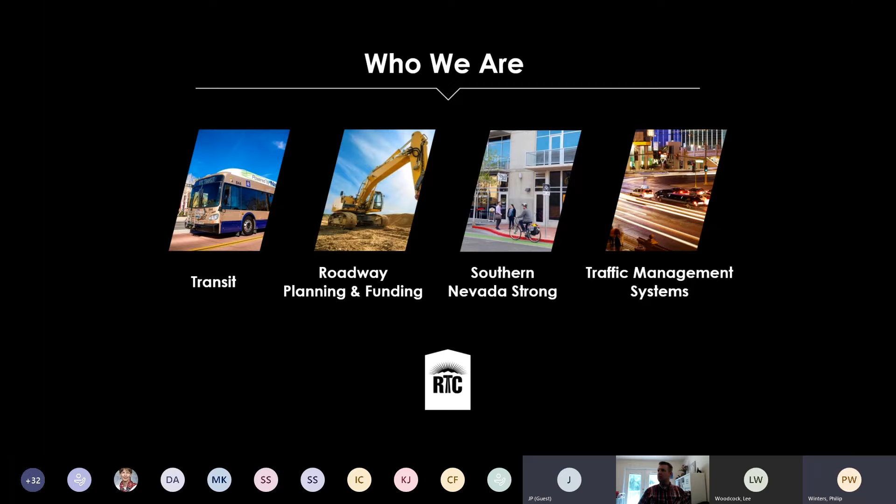So to jump right into it, the RTC's Work Zone Detection and Management Program started in 2015, and it was really the result of an extreme increase in construction activity in the valley. This increase was caused by many factors, not the least of which was a new local funding program called Fuel Revenue Indexing, or FRI. That program, and this is a 2013-14 timeframe, identified 225 mostly shovel-ready projects that were worth about $600 million.

The projects were promised to be delivered within a 5-year period, which was a very aggressive timeline, but that was necessary because this was coming out of the Great Recession, and it was really an economic stimulus package, a job creation bill. So that promise and the fact that the valley was coming out of the recession led to work zones, traffic control, and lane closures all over the valley, and it was causing a lot of angst.

So what's the big deal with temporary traffic control? One of the things you need to know is that the RTC does not permit any of the work zones in the valley. The member agencies do that. We provide funding for the capital projects, for maintenance projects, but the member agencies administer and deliver those projects and do all the permitting and inspections of the private development work as well.

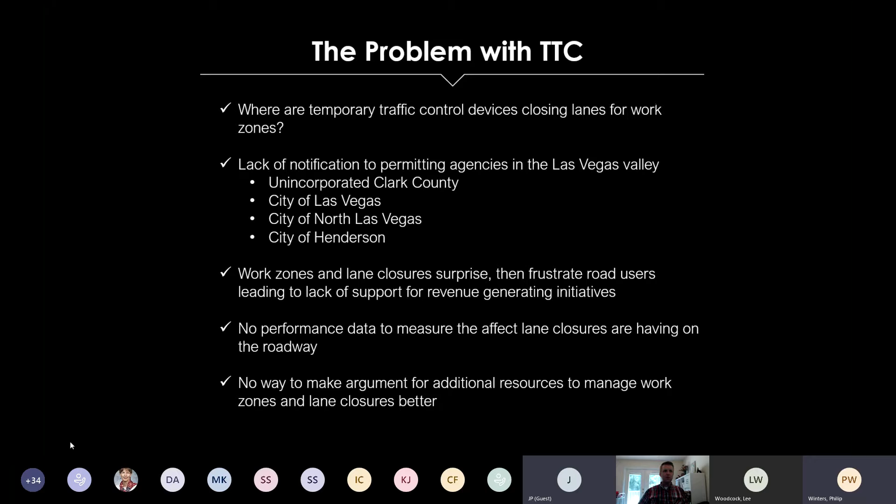So the concept of operation, we basically have this divided into 3 parts. Is there any way to move, I wonder, this? That's okay. I'll get over it. There it is. I figured it out.

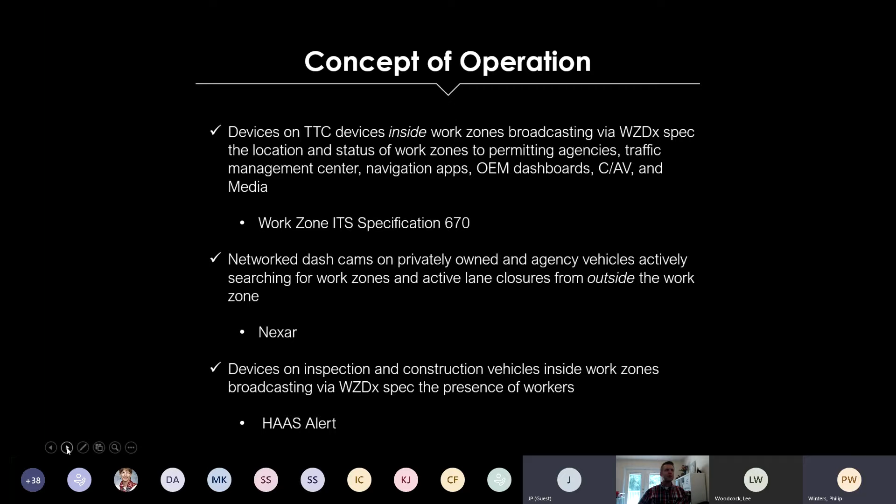Concrete curing, pavement markings curing, whatever. A lot of times, though, there are no good reasons. It's an issue with an out of compliance work zone. So we want to have the opportunity to know when people are actually in the work zone.

So next slide, please. So the work zone ITS specification. The draft of it is currently under evaluation. It is a voluntary participation at this point to get the member agencies to put that into their contract document so we can test the ability of the market to provide these connected, i.e. smart traffic control devices. Get them on the ground, get them broadcasting or sending out data, corralling that up, getting it in a format that is compliant with the work zone data exchange spec, and then sending it out for folks. This provides opportunity to industry to provide feedback to improve the spec.

It's in draft form. It has not been officially adopted yet. We've got a lot of great feedback. This spec took over a year to develop, and it's really been on the street just a few months, 3 months. It also provides the opportunity to discover the actual cost of connected traffic control devices. That's one of the things that we hear from some of maybe the status quo type minds that are still at some of the agencies. We've been doing projects for years. You can't make an omelet without breaking some eggs. What's the big deal? People will deal with traffic control as they've dealt with it for years.

We're trying to get a really good handle on what these things actually cost, so we can do a formal cost benefit analysis at the end of this. And we also want to see the benefits that are going to be provided when this feed goes out in industry. The market goes to work and spins back all of these wonderful things that only they can think of. Ultimately, the goal is to manage work zones better to increase safety while decreasing road user costs associated with the denial of access to roadway capacity, and that's really what it is.

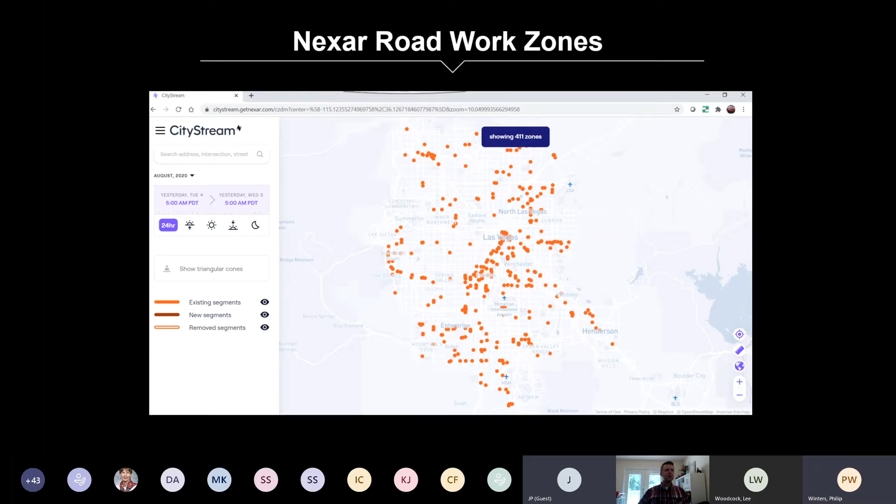You get the street location, the address, the time of day, the date, the heading the vehicle was going in, and the road you're on. So that's pretty cool. Next slide, please.

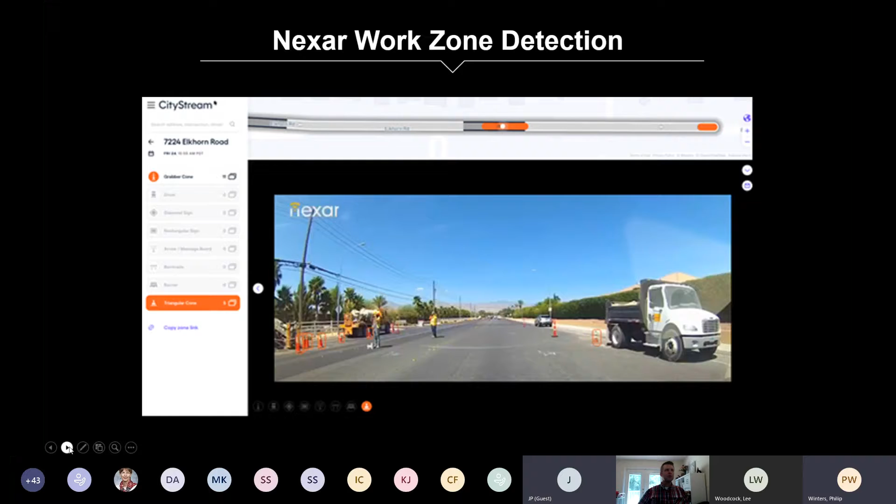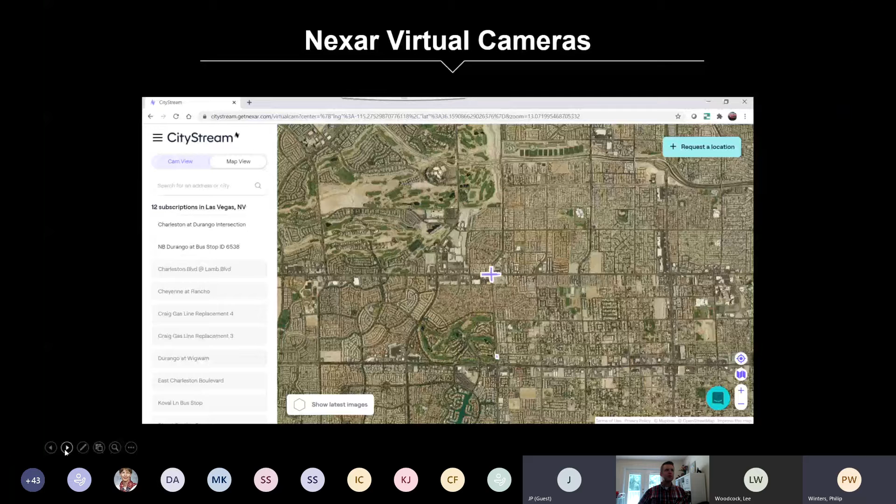And you can make those geofenced areas as large or as small as you want. It could be the work zone itself. It could be an intersection like this. It could be a bus stop. We applied for another grant, an FTA grant, with Nexar as a partner to use this technology to keep an eye on our bus stops on the Strip.

So this is really a powerful way for the agencies to get near real time, and we've tested this, and these images are uploaded within seconds of a person driving through, and we have access to them within seconds. Not technically real time, but close. So that's a powerful tool.

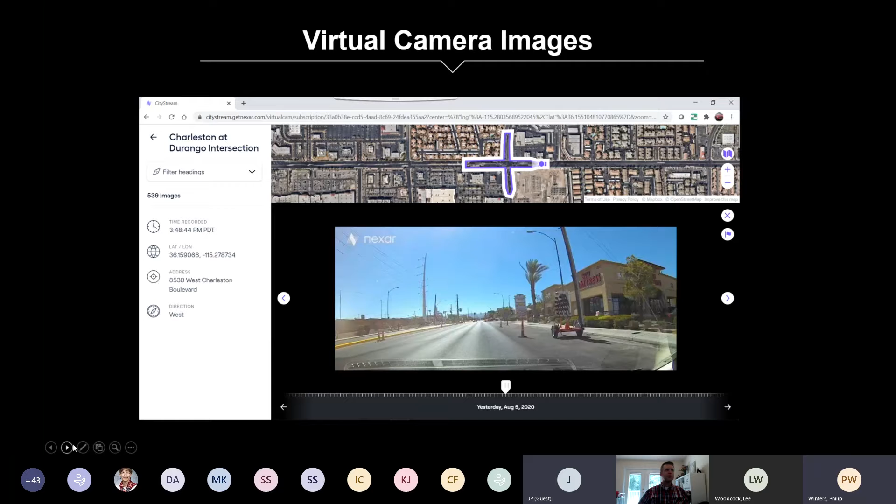You'll see at the bottom each of those little hash marks. Those are separate individual images, all with a time and date stamp. So that is pretty cool, we think. And the agencies think so too. Next slide, please. This is slide 12, so we're winding down.

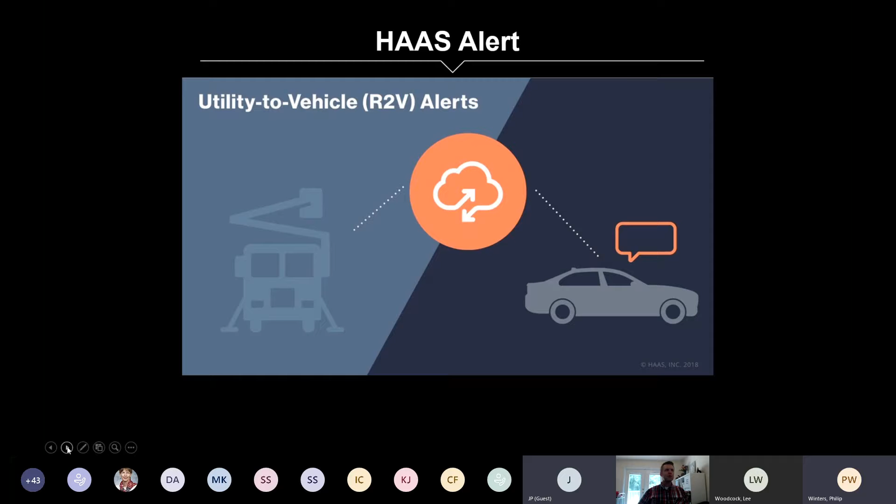The next partnership, the third leg of the Work Zone Detection and Management program, is our partnership with Haas Alert. We've been partnered with them now for about a year and a half. And next slide. This is where we want devices on work vehicles to let us know when workers are present.

As I mentioned before, the other huge benefit is that Haas Alert has a relationship with Waze, and Waze users will then get a warning in the app or in their dashboards, if it's a Waze-enabled dashboard in the vehicle, that there's a work vehicle ahead, and of course that's a good thing. People start looking around, what the heck is going on, slow down, pay attention, all those things that are wonderful in work zones for people to do.

But it also communicates to us when the amber lights come on, and I'll explain that in a second, that, hey, we got an active work zone. So a person calls, hey, there's a work zone that I don't understand. Why is it here? They call the agencies. They call the RTC. We can almost immediately see that there's a work zone there. There is no work going on.

Let's figure out why and get the cones down, get the traffic control down if there's no reason for them, and explain to the citizen why they're there without seeing anybody quote unquote working if there is a good reason for it. So that's good. It's a communication device for us, but it's also a safety device. And then next slide, please. Next slide.

That is what a vehicle looks like in the Haas Alert dashboard. The device is tied to the amber lights in the vehicle, so you can always track your vehicles. This was developed for emergency response, and we've kind of turned the concept on its head. The idea is that the emergency vehicles would have emitters, and people would download the Haas Alert app, and when an emergency vehicle was coming up on them, the two would communicate, and the user would get a warning: emergency vehicle approaching from the left, or emergency vehicle approaching from behind.

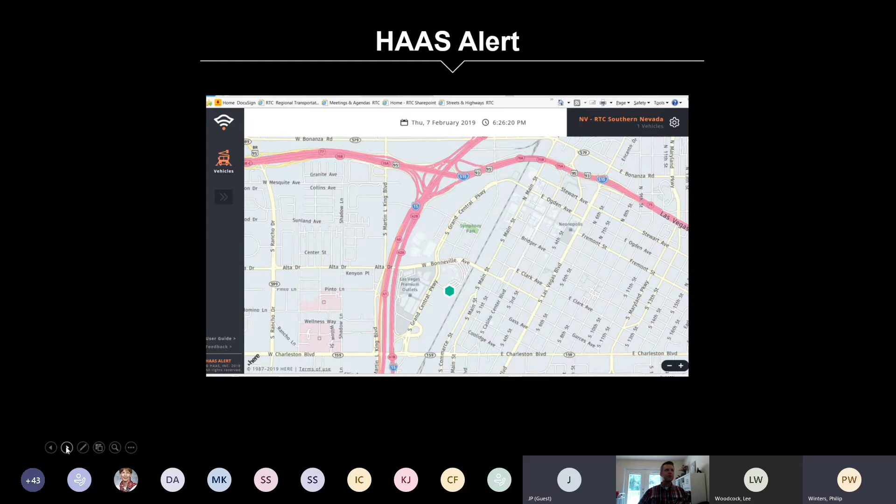So they're tied to the amber lights. When the amber lights go on, this goes green, and then if you click on the last slide, you'll see the message that shows up in Waze: utility hazard, utility vehicle ahead, work zone ahead. Again, this combined with the other legs of that stool I was talking about: smart devices in the work zone, broadcasting to Waze and through the work zone data exchange to other things.

The Nexar application that isn't open to the public, that's an internal system that we can use to find these things. And then finally the Haas Alert. Those three things are giving us excellent abilities to find active lane closures, which is really the point of all this.

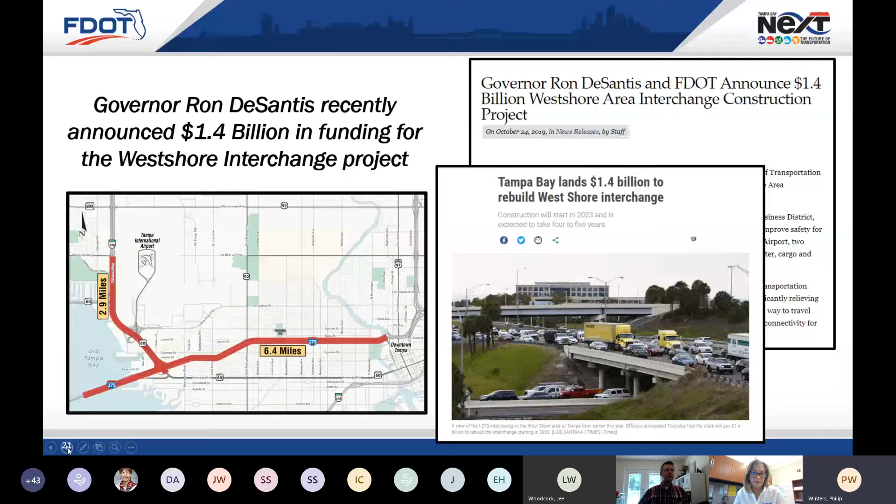And last fall, Ron DeSantis was able to announce that we were awarded funding for a $1.4 billion project, which is the reconstruction of the Tampa West Shore interchange. As you see in the map on the left, the general limits of the project are the Howard Franklin Bridge on the west, down to the Hillsborough River, and then on up towards the Veterans Expressway. This is a very big project, very important for the region, very necessary as well. Next.

So if you travel through Tampa, you understand that this is at the center of Tampa, and it's very congested. We have bottlenecks every single day. We have some capacity constraints, and we really need to make some changes. So we feel very fortunate to have the opportunity to expand the ability for people to move throughout Tampa.

It's very important to have an opportunity like this, and it's very comprehensive. So we'll be able to show you over the next several years how we're developing our transportation management plan in order to facilitate the construction of the interchange. Next, please.

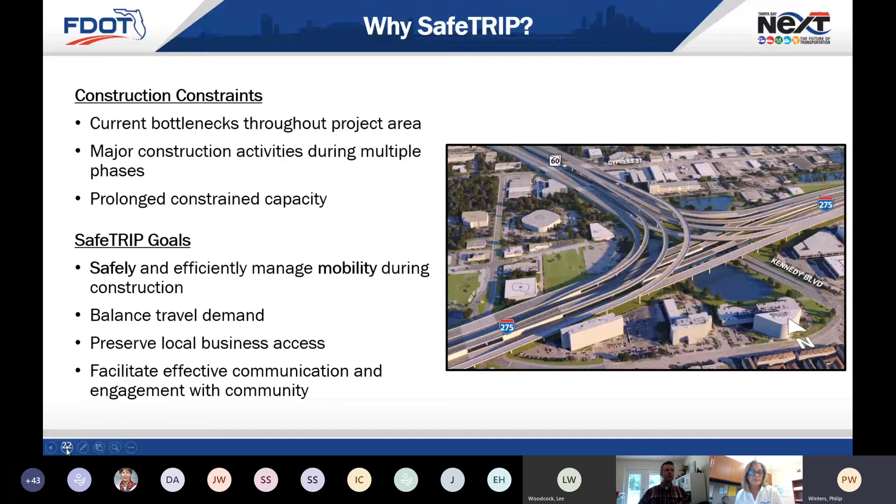So SafeTrip is the brand that we're using to encompass our transportation management plan. And that's basically our umbrella. And then TRIP, of course, SAFE is very important to all of us. We are in one of the worst regions across the country in regard to our fatalities and serious injury crashes. And we want to make a difference in that world.

And simultaneously, we need to manage everyone that's trying to move through the West Shore interchange. So we've divided into 4 elements that create our TRIP. So we have our traffic management, we have regional demand management, we have innovation and public engagement. Next, please.

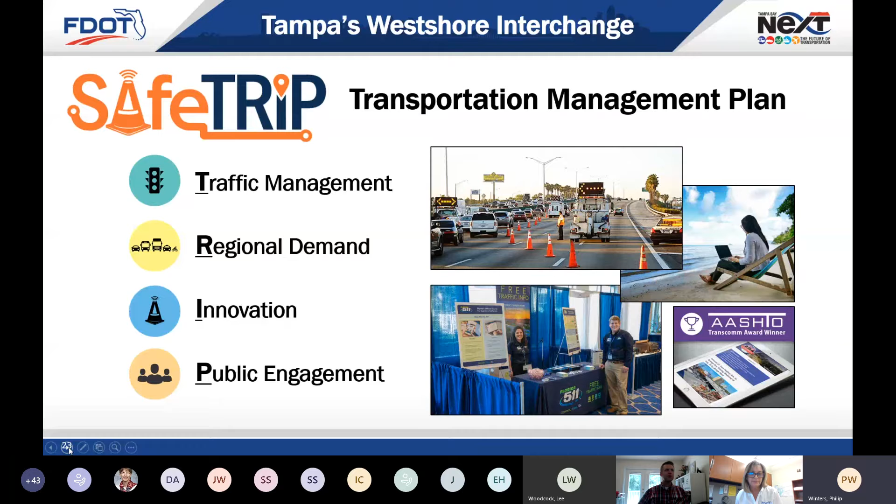We've spent some time so far establishing our vision and what we really want. And this is how it stands. We're working very strongly in creating a plan that is well planned and innovative. We want to make sure that we have the latest technologies available, and we're deploying those as quickly as possible. Focusing on safety and reliability, and making sure that we're not just moving cars, but also making sure that we provide quality transportation choices for all of our users. There's all kinds of needs out there, and we're being very attentive to that.

We want to be strategic in how we present and do our implementation, as well as make sure that we have proactive communication and we are receiving feedback and incorporating the feedback that we get, and then how does it influence our process. Next, please.

So this is a deeper dive into all the goals for our TRIP. And there's a lot to read here, and you can go back and read all of it, because I could talk about all this all day long. But in the traffic management, I am proud to say that at this point, we're looking at projects that we could advance and get on the ground before we go into construction. We're also looking at instrumentation. How can we use technology in order to help our local area network be more effective in handling any kind of increases in traffic on the local streets?

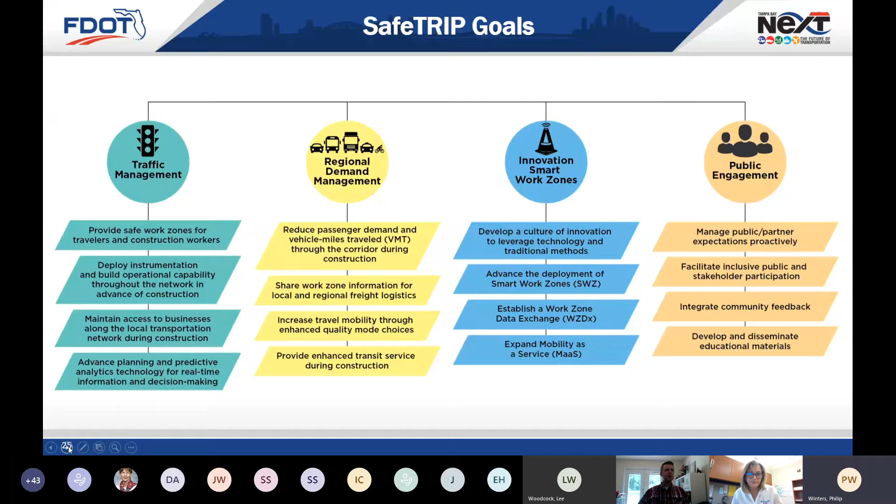It's going to be really important because, you know, as soon as you put those drums up, or barrels, whichever you want to call it, or an arrow board, you know that we're going to already lose some of the capacity. And it's about bringing people through the entire work zone safely and harmonizing traffic and traffic speeds.

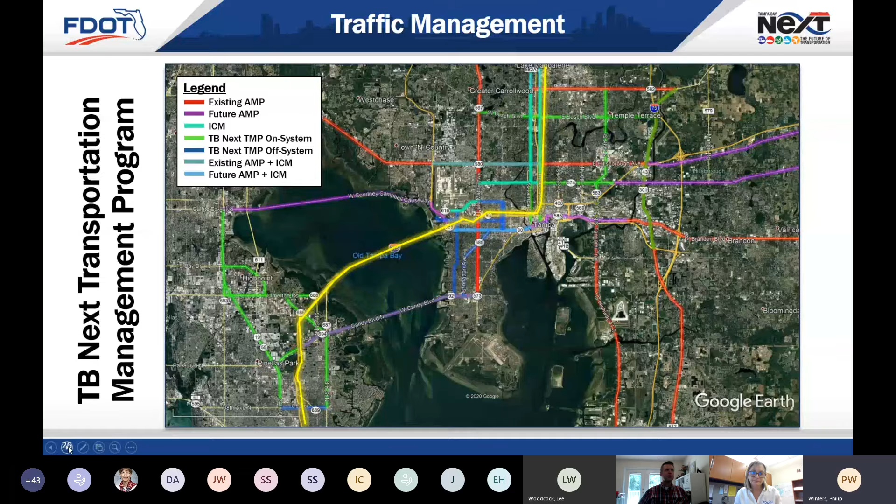Next, please. The regional demand management, where we stand: as a matter of fact, just yesterday, we got some pinpoints. We're trying to identify very specifically where people are commuting in and out of the West Shore area. We're identifying who's passing through, what that volume is, and recognize them as a user. But we're also getting down into those other trips, like a 3-mile bicycle trip is a reasonable commuter trip.

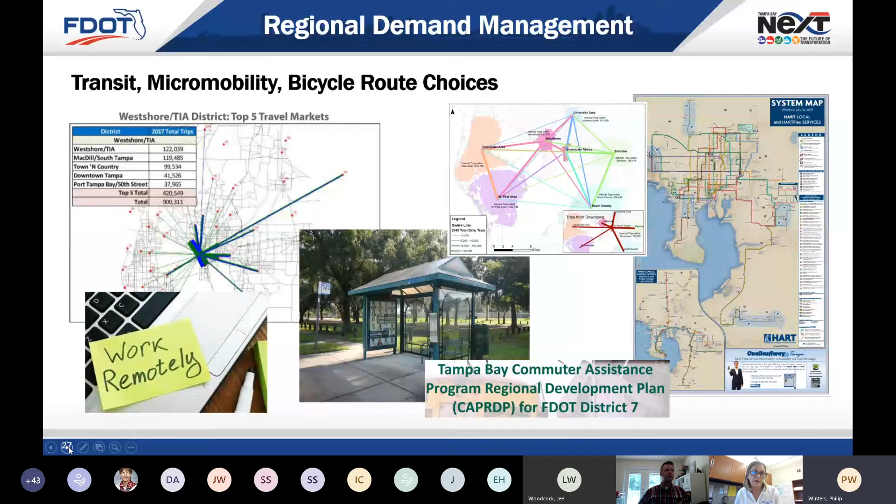So what about that 3-mile stretch? And then do they have safe choices in order to do their daily commute, maybe on a bike? I mean, we do live in Florida, and it may be hot right now, but most of the year it's comfortable and you can actually ride your bike to work. Next, please.

Another sub-element that we have under innovation is our smart work zones. So the zipper merge is the late merge. And that is a concept that has actually been deployed in multiple places across the country. And we're working very strongly on how to make that work and make it as real time and automated as possible. We also have speed harmonization as another component of our smart work zones. You'll hear a little bit more about that when Dan D'Antonio presents about our pilot project on Gateway. Next, please.

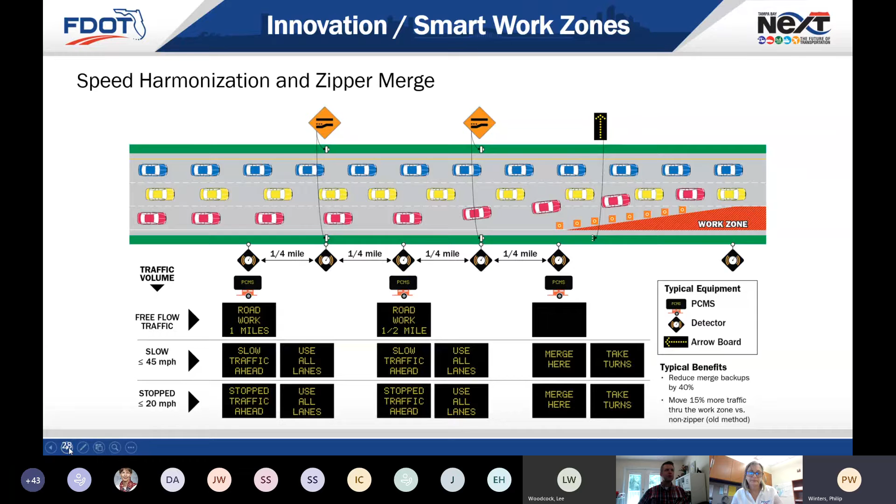The public engagement, it's all about having that real-time data out there. We have been doing a lot of research on the use of iCone products. I love the concept of having the sensors that are already on the arrow boards and using the rentals. They already have the smart technology in there. So if anybody activates an arrow board, then we're going to be able to send that information out and get it to Waze, basically, or any kind of app that somebody's already using in order to navigate the transportation system.

Fortunately, in Florida, we have Florida 511 and then the DIVAS program. As far as getting out data feeds, there's a very robust opportunity that's already occurring in Tallahassee. So we are paying attention to what Tallahassee's doing, but we also want to make sure that we have a robust program here within Tampa. So there's a lot of action that's going on. We're trying to bring it all together. At the end of the day, it's really getting the information out to the public. But we're into neighborhoods, we're into all kinds of different smaller groups as well, or larger groups, excuse me, and businesses. Next, please.

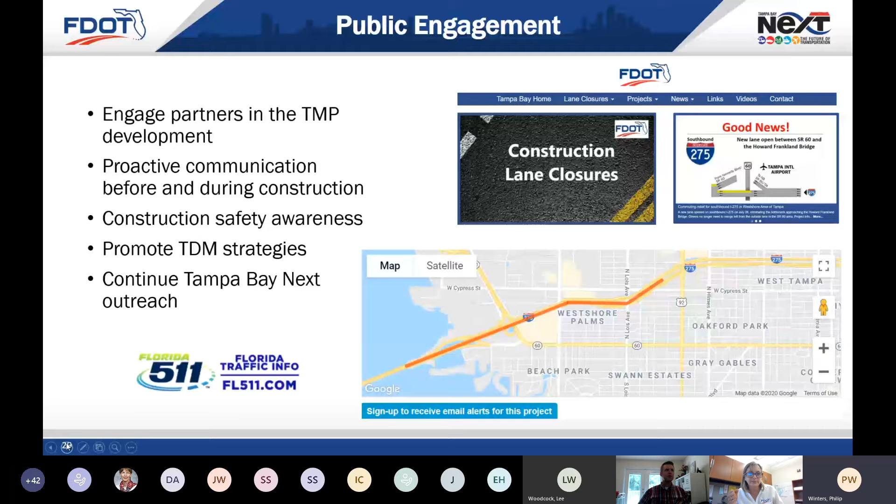So on the business side, we do have a community advisory task force, and these are our business partners, and we've had our first meeting already, and we have another one coming up probably the first part of September, if not the end of August. We look to them for feedback and participation. Some of the smaller projects they may be able to deploy, they may be seeking grants or whatever it might be, because it is going to take a very collaborative effort.

I like how, JP, you had mentioned that someone on the street doesn't necessarily know the jurisdictional boundaries. So it's upon us to be seamless in order to provide the solutions from this one government. They just see government, and we need to make sure that we're doing our job and we're being collaborative so they have the best experience within the transportation network. Next, please.

The community engagement that we've been performing has been very robust. We needed to, because we needed to change what we were doing from a couple years ago, and we continue that. Even though we're in this COVID situation, we are still having meetings. I think most people have gotten to the point where they're comfortable being on a Zoom or a Teams meeting or whatever it might be. It's the nature of our business now.

And we even now have guidelines to do public meetings on an interface or a platform such as Teams, like we're doing today. We're pushing a lot of information out, so we're trying to get information out as well as making sure that we create the right conduit for people to send feedback to us as well. Next, please.

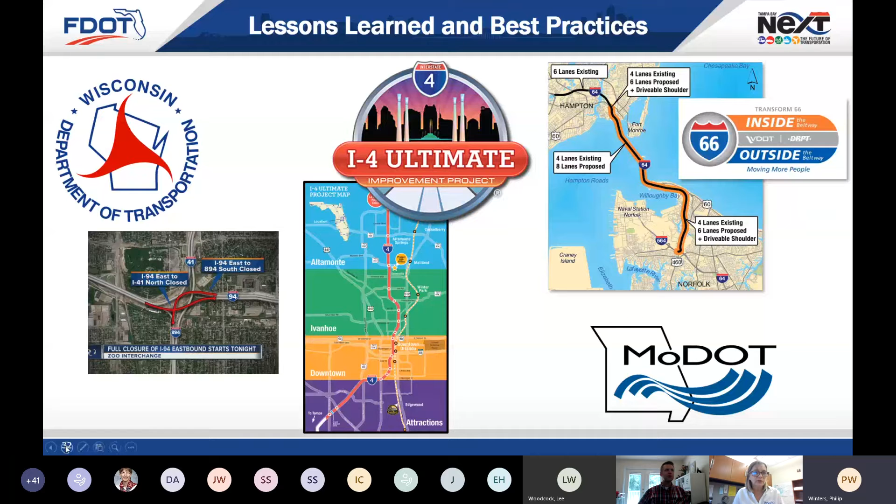So hopefully one day, because our project is so large, we're going to be able to share this same information and our lessons learned with others. So every go around, it's going to get better and better. And then we also have some additional calls that are coming up with Wisconsin. Next, please.

So here's an overall schedule. We are developing Safe Trip right now. Then we expect to complete the plan and let it kind of rest. We're going to finish that up and have a really good, strong document in the spring of next year. And then in the meantime, right now we're looking at early project deployment.

Because there are projects that are already in our work program, we're trying to make sure that those stay on pace or on target. If there's a reason they have to be delayed or there's a reason we can't get it done, we have to look at how we're going to supplement that. And so we're studying very closely. It's a very demanding time right now for us to establish funding mechanisms and then looking for future projects. And we are looking for a lot of different ways for us to get things built.

Again, we're not just looking at DOT activities, we are also looking at what local government agencies are doing. For instance, we're very interested in seeing what the city of Tampa has on their plate for their bicycle infrastructure within the Tampa Bay area, and how that bicycle infrastructure is going to be built and in place by the time we go into construction. The West Shore interchange starts in 2024. That's when we get our shovels in the ground.

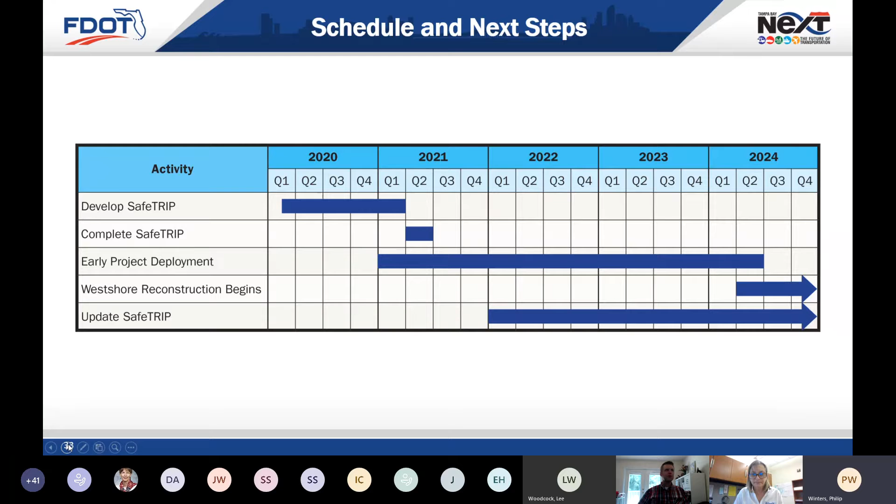And that's all I have, and I am ready to answer questions. It's a lot, but there's a lot of background, and I've got a lot of great people standing right next to me to make it happen. Excellent. Thanks, Margaret. Any questions from around the floor for Margaret? Wait, really? I've got one for you.

You mentioned COVID a couple of times, and we don't know what the future is going to look like in terms of how travel is going to change, how accommodation requirements are going to change for businesses. But how have you been able to kind of scenario plan for increases in different modes that might be used, like you say, car through to micromobility or to cycling, and the demand from businesses?

How do you reconcile all of that in what you're looking to do? Can you reconcile all of that? Well, we're still in the process of developing the strategies and the concepts that might be available. And because we're still in the early stages of this, we are basically putting everything on the table that we can possibly put. You might be familiar with the successes of the Downtowner for downtown. And that program has been very, very well received.

And when it comes to the TIM group, they started bringing to our attention elements such as making sure that we have shoulders. Even though you may not have shoulders through most of the work zone, do you have locations every half mile or so where it's wide enough that a Road Ranger truck that has a push bumper would be able to push a vehicle out of the travel way? And then also making sure that we have all the legal rights in order to push it before the FHP shows up and it becomes something much bigger than what it needs to be.

That's just one example. And then also we've already talked about having a more robust Road Ranger program, and then the higher back program, how can that enhance it? So that's a complexity, but that is certainly baked into what we're working toward accomplishing.

Excellent. Thank you, Margaret and Alice. And Dean has just said the Hillsborough meeting is on August the 18th at 10 a.m. So perfect timing. Right, thank you, Margaret. That's really appreciated. Let's move over to Dan on Smart Work Zone concepts. I know Phil has been trying hard to give you control, but I think we're just going to have to drive it. Next slide, Dan, if that's okay. So over to you.

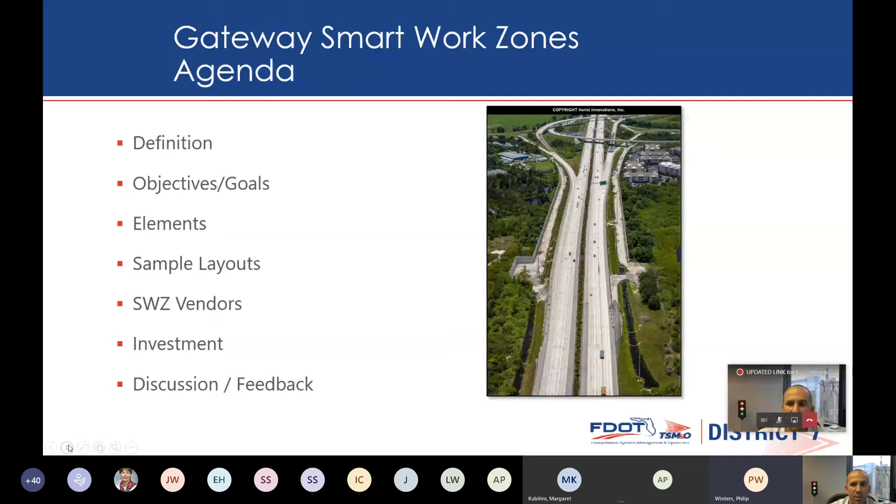So FHWA defines a smart work zone as a work zone that's real time, that it's portable, it's automated, and it's reliable. And I'll show you how each of these components are being considered for Gateway. Next slide.

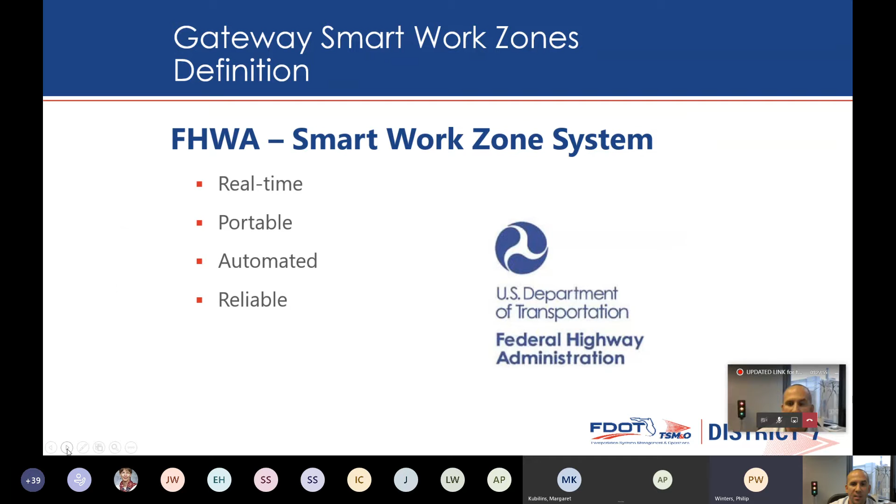So as part of the Safe Trip initiative, we've identified goals and objectives for what we want to achieve with smart work zones. So they're pretty basic. We want to improve safety, and we want to harmonize speed. Harmonized speed is a twofold benefit. It can improve safety, but it also can improve throughput, which in turn improves reliability. Those are two things that are increasingly important for over-congested, oversaturated areas such as the Tampa Bay area. Next slide.

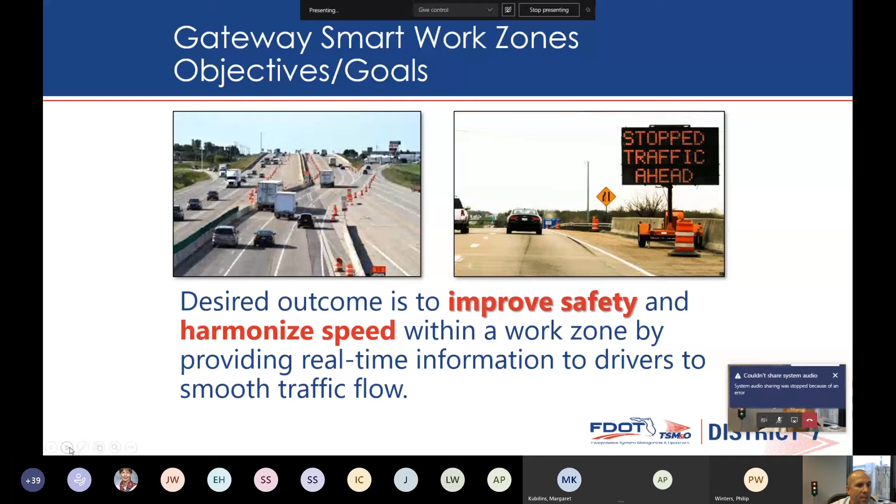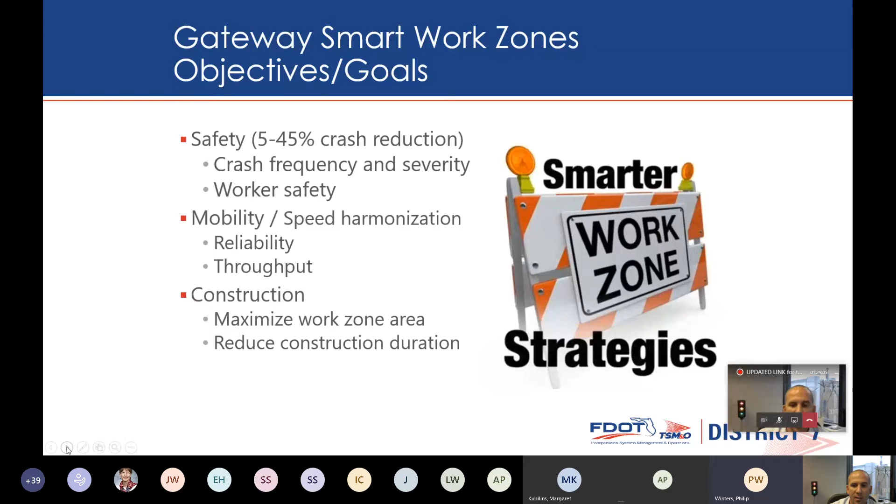So across the country, although smart work zones are somewhat new, we do have some statistics that we found where we can expect to reduce crashes by about 5 to 45%. It's pretty big stratification, which is part of the reason why we're looking to get some data for the local area. We do have some tried and true TSM&O solutions that have improved mobility through speed harmonization. And then within construction, we definitely want to maximize the construction zone areas, which would reduce construction duration. And these are really key things for contractors. Next slide.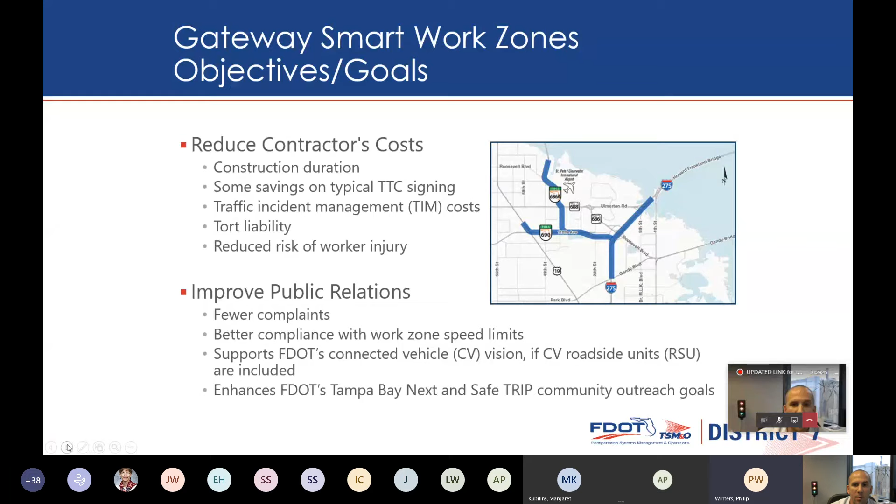So the Gateway project is what's shown over there on the right part of the screen. And this slide is put together because we actually have to get buy-in from contractors if we're to implement smart work zones at this stage in the project. So with the RTC, it might be a little bit different where we're not necessarily integrating in with contractors. But with this one, we need buy-in. So we put this together to show the benefit to them so that we can get smart work zones implemented, not just in Gateway, not just in Tampa Bay Next, but broadly across the region. And then we can share these. I don't need to read the bullets for you, but that was the intent of the slide, is to show the benefit from the contractor side. Next slide.

So now to move into some of the basic elements. Well, the real-time data collection, we'd really want to know what speeds are like through the work zone, and the speeds will allow us to harmonize those speeds. Queues are also very important because we want to be able to message on where to expect queues or stop traffic. And then we want to know the volumes, which give us the throughput part of the equation.

With the real-time messaging component, that's where we're going to use different techniques to provide messaging to the drivers, whether it be through roadside portable changeable message signs, onboard units for connected vehicles, smartphone apps, and a number of other ways to provide that messaging. And on the harmonized speeds, it's a very important component, and I'll show you how we're looking at variable speed limit signs, specifically in Gateway, to achieve that. And then lastly, this information is going to be relayed back to the Regional Traffic Management Center. Next slide.

So the various subsystems that we're looking at are definitely smart and portable sensors. Closed circuit television cameras, those are deployed along our roadside, really on 1 mile spacing, but already give us full coverage. But smart work zones introduce different geometries. And whereas our permanent CCTV locations may suffice for our existing geometry, they may not for the work zone. Portable changeable message signs, and as we saw from the previous presentation, they're getting smarter. They're not just providing messages. Variable speed limit signs, speed feedback signs.

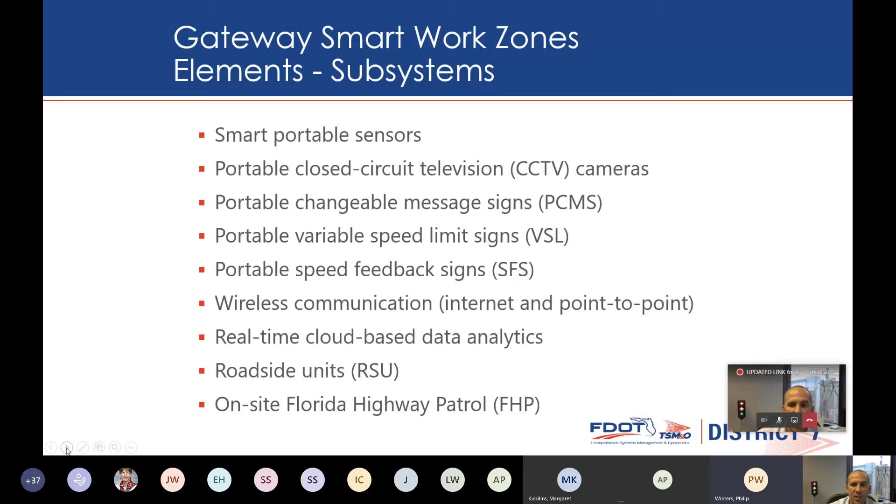The devices are important, but then we also want to be able to communicate. We want to collect data, transmit data, specifically in a WZDx compliant data feed. And then we want to store that data in real-time cloud-based data analytics that will allow us to process it and make decisions. And then the last two components or subsystems are traditional roadside units. Well, they're becoming traditional as we've gotten more CV deployments. And then FHP for enforcement activities. Next slide.

All right, so for the portable sensors, I wanted to show the group that they come in various shapes and sizes, and that's really important for work zones because in Florida, we see drums quite frequently, but we also see concrete barriers, and concrete barriers allow us to actually deploy the strobe lights on top of the barriers, and these strobe lights can also have sensors. So if we don't have barrels, but we have barrier walls, we can still deploy these. We already saw they come in cones, and they also come in portable changeable message signs, which give us a lot of tools in the toolbox for collecting the data at the locations that we need. Next slide.

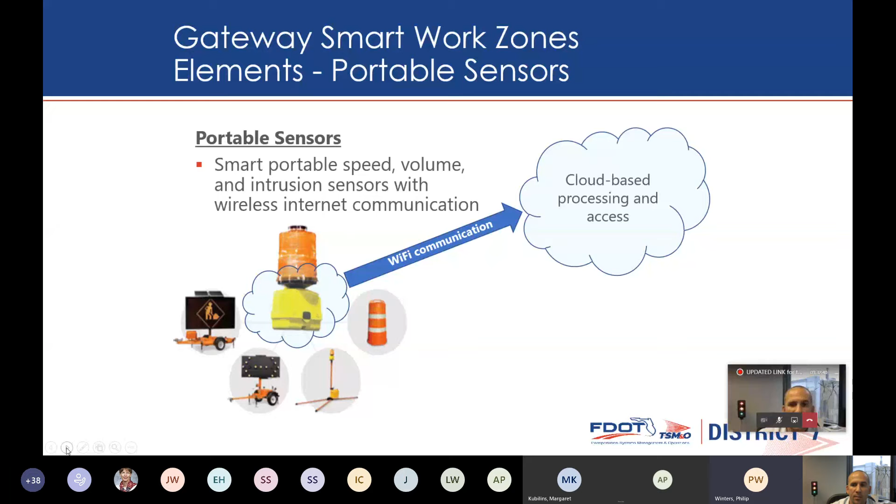We talked about the portable CCTV, but the one thing I wanted to point out on this is not only is it for surveillance from the Traffic Management Center, we can also do things like speed collection, volume collection, wrong way driving detection, various other data collection efforts with CCTV. And that's what makes a portable CCTV even more valuable. Next slide.

So with the portable changeable message signs, generally they are connected to the devices. They can display a library of messages that are predetermined based on algorithms that are fed by the device data collection. And then they provide the feedback to the driver in a traditional roadside method. Next slide.

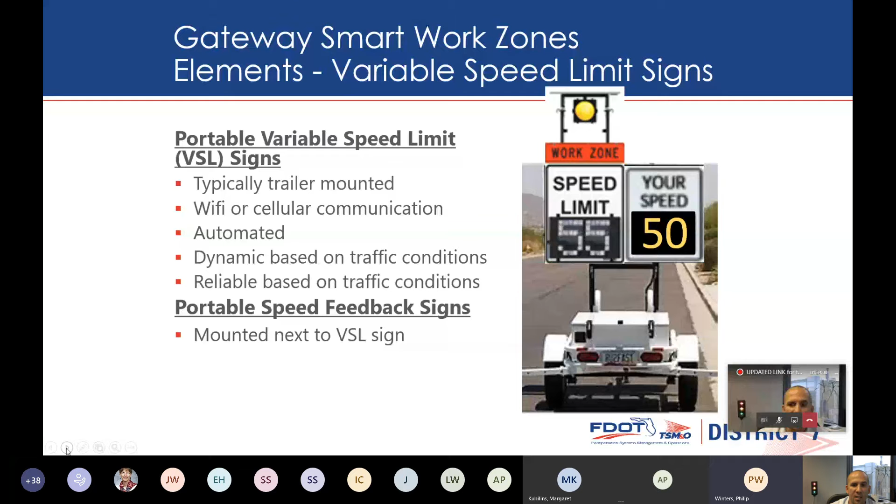With the variable speed limit signs, you'll see on our diagrams that these are components that we're looking for in the speed management component. So there's really three parts to it. Posted speed limit, which could be enforced by the law, the speed feedback, which is reminding people what they should be traveling, and then we can enhance that with additional devices such as the flashing beacon you see in the example. Next slide.

So this is a little diagram of, I think, what this group is mostly familiar with now and how we would implement something like a data warehouse and a work zone data exchange compliant data feed. So we're collecting new types of data from all of the smart work zone devices that are deployed or can be deployed. We're enriching that data with more traditional methods like the cameras or Bluetooth readers, weather stations, road weather information systems that we already have deployed. The intent on a work zone data exchange is to make that all in the same data format so that anybody can come and grab that data and use it, as we heard about in the previous presentations. Next slide.

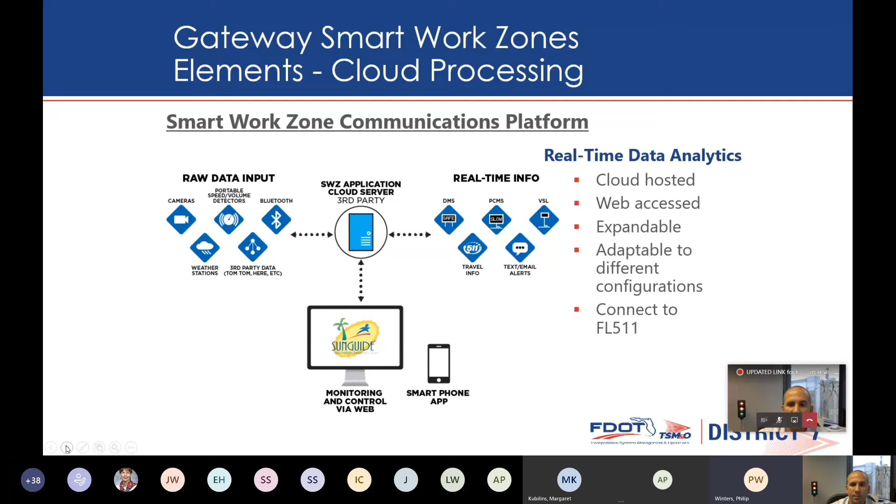So this is a layout of the zipper merge. I want to fast forward to the next slide to give you a little bit of a PSA announcement that Minnesota DOT did for the zipper merge. If you click on that, it may open that up in YouTube.

What is a zipper merge?

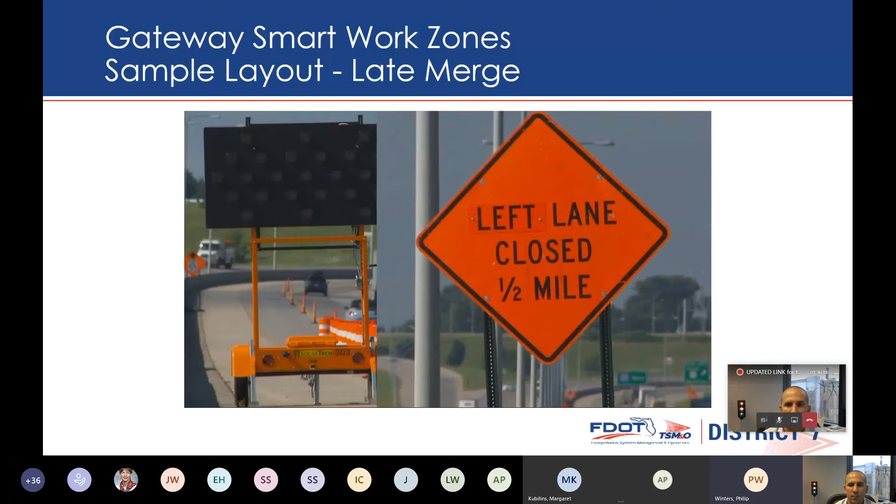A lane is closed in a freeway construction zone. There are signs and arrow panels well ahead of the closure to let motorists know they need to move to an open lane. Traditionally, drivers merge as soon as it is safe to do so. Use a traditional merge when traffic volumes are low and cars are moving at highway speeds.

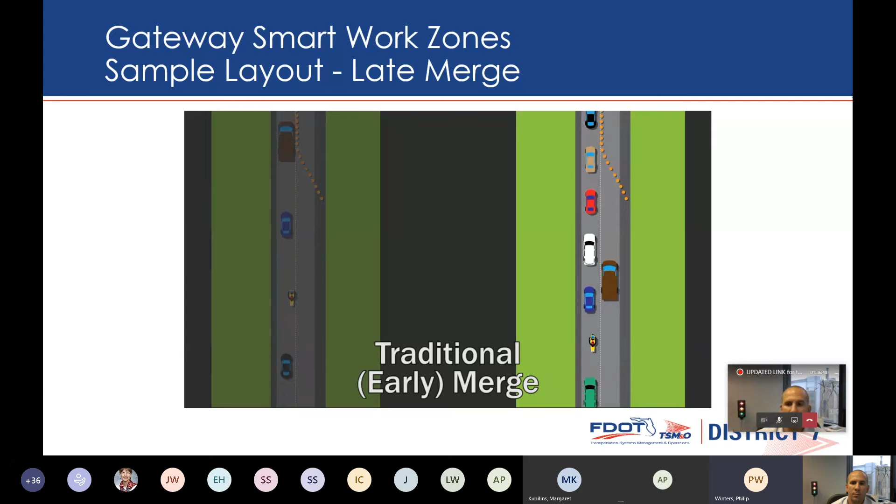When traffic is heavy, that one lane can back up fast. Sudden dangerous stops, significant delays, and angry motorists. When traffic backs up, there's a better way to merge. A zipper merge, also called a late merge, has motorists stay in their lanes until they reach the merge. There, each driver takes turns, alternating one lane of traffic, then the other, just like a zipper.

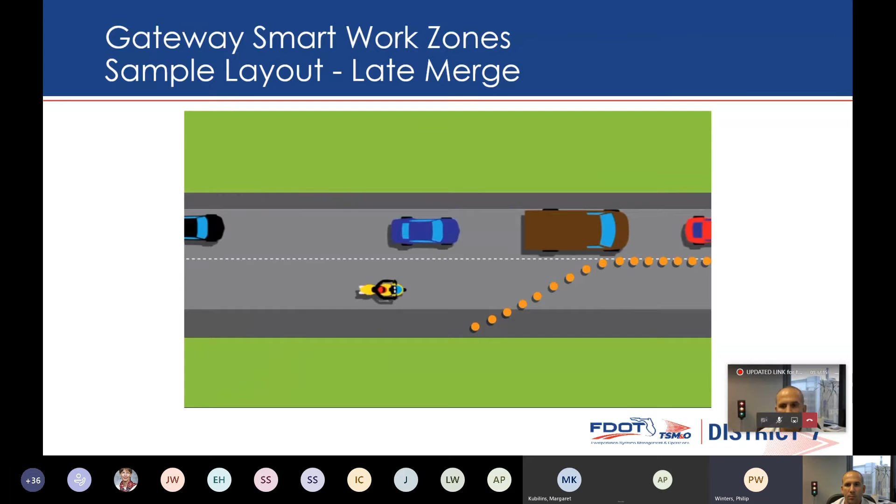Research has shown that this reduces backups by as much as 40%, as well as reducing serious crashes and road rage. Traffic can flow smoothly, backups can be reduced, and everyone benefits. So make your drive a zip. Do the zipper merge.

So I thought that was a good demonstration of how it works. You know, it's really just being courteous to other drivers, but the way a zipper merge works in reality, which is what we're showing here, is through a series of messaging, reminding people that this is the better way to merge for the benefit of all.

But the unique thing about a smart work zone is that the message signs are populated by device placement, which would indicate lane closures, but then also by congestion as shown by speeds and volumes within a work zone. So it can fully be automated, and that's what we're showing here on what would eventually be a standard plan. Next slide.

And it's a similar scenario where we start to have more lane closures. Within Gateway specifically, we do have 2 lanes closed at a time in some instances as they do quite a bit of bridge construction. I know the folks that are live in this region know that that's a big mammoth project, but on the scale of the West Shore Interchange for the Safe Trip program, you know, that's a $1.4 billion program. So we'll have several of these applications, and we'll go through these standardization and plans with each of them in deploying the smart work zone devices.

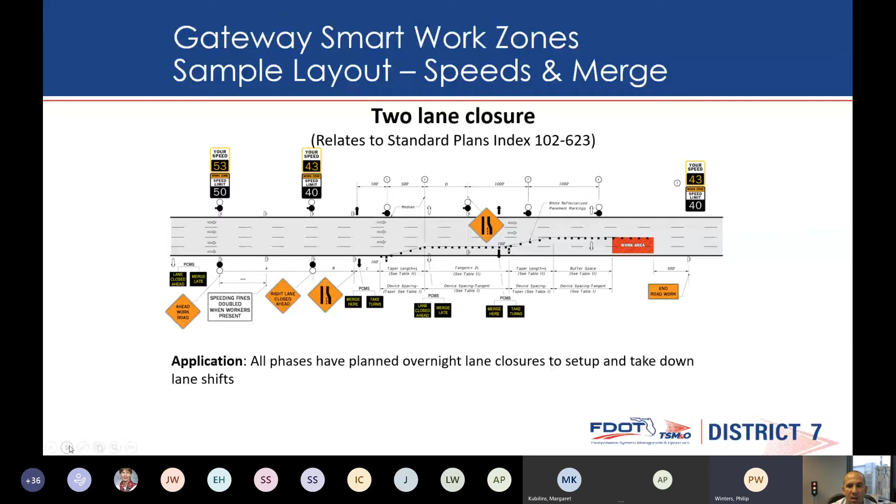Next slide, and we're wrapping it up here. So this is the most complex. This would be a diversion. So it seems to get fairly busy, although this is condensed. But you see what we have on here is all of our smart work zone strategies where we have speed management. You see the variable speed limit signs. We show the devices that are detecting what's going on within the work zone, and then also zipper merge. So the good thing about the smart work zone strategies is they are scalable and they can all be overlaid for specific use cases. Next slide.

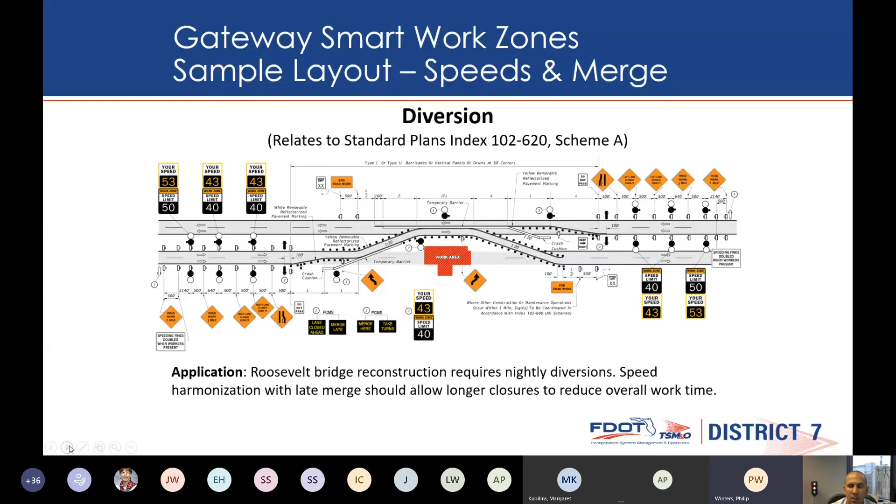So through some research and looking at and talking to vendors, we have put together this return on investment chart. And really what we're seeing is that the longer we deploy the smart work zones, the greater the return on the investment. Although the cost escalates, the number of crashes that we can expect to reduce also increases to where we see some very big returns on investment for some of the longer duration construction projects.

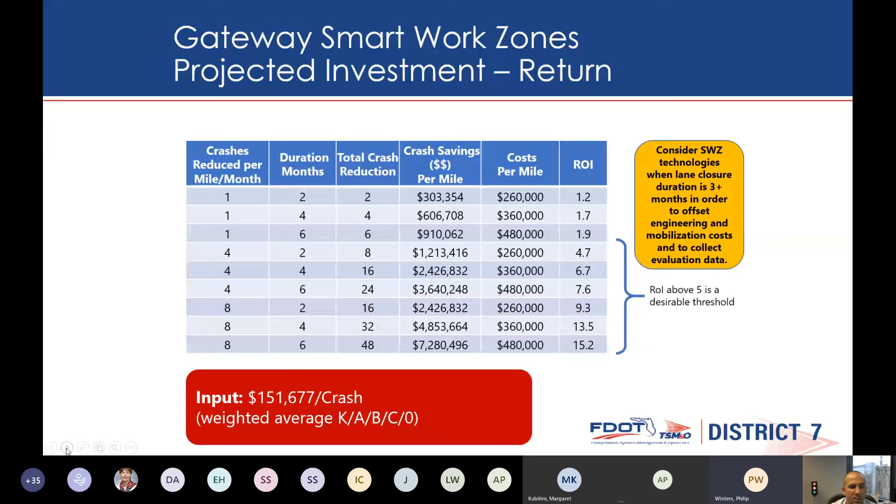And we're really looking to refine this graph or this chart as we collect real world data here within District 7 in the Tampa Bay region, starting with the Gateway deployment and moving on to other projects. And with that, that's the update on the approach for smart work zones within Gateway.

Awesome, thanks Dan, thanks for doing that so quickly. Got one question coming from Pete Costello. Do you want to unmute yourself and ask your question?

Sure. Thanks, Lee. Hey, Dan, has that merge late message been used with success elsewhere? Yeah, actually, of these strategies, I think that is one of the more mature. And so when we talk about mature, we're only talking 1 to 2 years. I can't tell you exactly where, but it hasn't been used that frequently within Florida. Although I do know that there are some arterial areas that we're also looking to deploy it and look at the benefit. But Pete, I'll follow up with some of the research that we've done on other areas where it's been deployed successfully. Thanks, Dan.

Sure. I can chime in. It's been done in Nevada. The Nevada Department of Transportation did it on our huge Project Neon, which was on I-15 right through the middle of downtown Las Vegas and US 95, another urban freeway that intersected with that. So NDOT was very pleased with it. Great. Perfect. I won't follow up, Pete. There's one example.

Excellent. Ken Spitz. Ken, have you got a question regarding standardized signs? Hey, Dan. I know in the past, I think it was in Georgia, I saw a sign at a ramp, and I don't think it was necessarily construction, but it was one of those 2-lane to 1-lane, you know, as you're coming on, and it said take turns. That's kind of a zipper merge, that's exactly what it is. Are there some sort of standardized signs that FHWA is using? Because I don't think most people are going to know what that concept is.

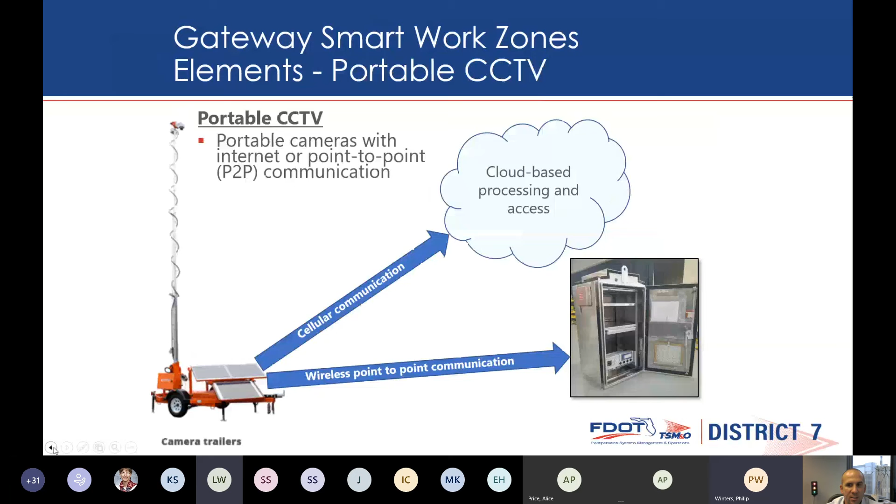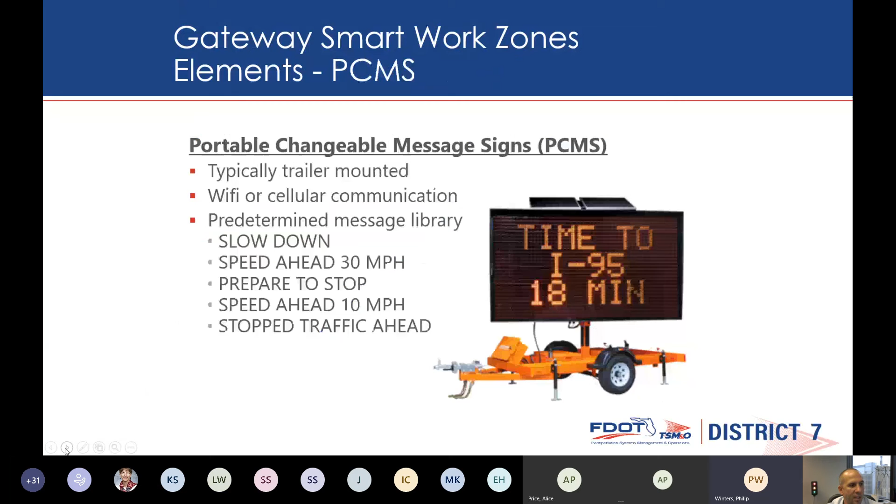And the last thing on that, if you would just real quickly show slide 15, because I think slide 15 does a good job at showing the sequence of messaging to do our best to get people to obey the signs. Next slide past that one. Keep going towards the end. It's actually towards the end that showed the layout of the zipper merge, and we went through that one pretty quickly. But it shows the sequence. There it is. So slow traffic ahead, use all lanes. Road work ahead, slow traffic, use all lanes. And then merge here, take turns.

That does require that the yellow cars in that line are courteous and let the red cars in. But the concept is that if they're seeing that these people were directed to do this, they'll be a little more generous in allowing them a gap to enter that middle lane. So, we'll see how it works. We heard that it worked fairly well in Nevada, and we'll test it here.

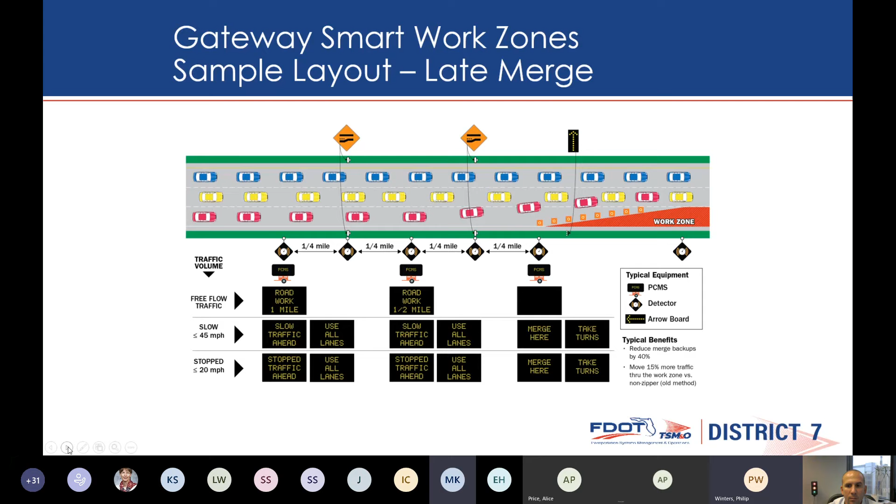You can also go to YouTube. It also worked in Virginia. Yeah, you could go to YouTube and just check for other examples of this. In our research, there's three different versions of the PSAs that were going out. So there's a lot that is already explained out there.

Excellent. Thank you all very much. Thanks, Dan. I really appreciate it. So I'm going to be bad cop and have to move on to the next piece. This next part of the agenda is more conversational, more open. Sean's going to facilitate a conversation around work zone data particularly. But then there's a section towards the end where we've got more of an open forum for public agencies if they've got any updates they would like to share and contribute any thoughts they would have. So I will now hand over to Sean.

Thank you. Great. Thanks, Lee. So I'm Sean Barbeau with the Center for Urban Transportation Research at USF, and we've been talking about the work zone data exchange format, or WZDx, for a little while now. It came on our radar early, and it's been integrated into the Safe Trip campaign as one of those information sharing techniques. In a nutshell, this is a standardized format published by US DOT, and its goal is to enable standardized sharing of work zone information.